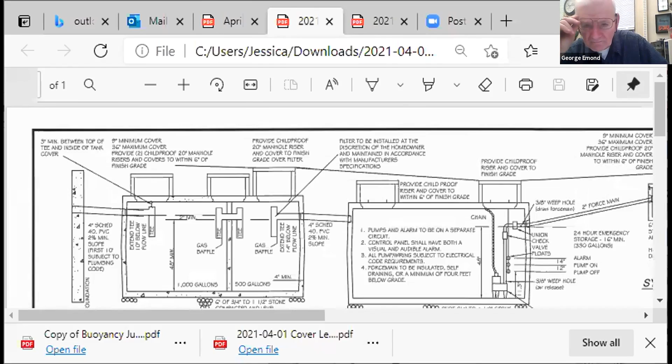Can you all see that? Yes. Perfect.

Thank you, Mr. Chair. For the record, Justin LeClair, McCarty Engineering. The letter you just read pretty much was my presentation for tonight. At this point, if you guys have any additional questions, I believe the letter is self-explanatory.

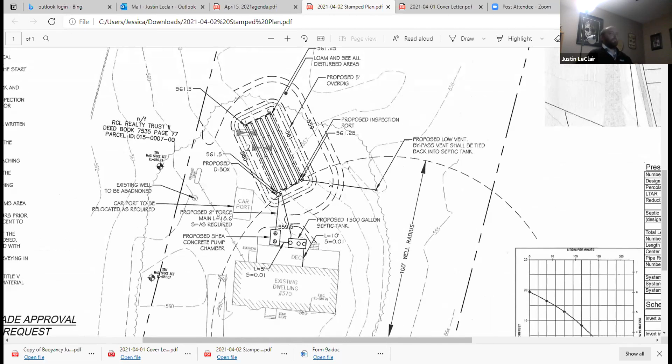As you can see on the plan, the house is here. This note, existing well to be abandoned, that's the existing shallow well located on site. The existing septic system is located in the front yard here. That will be abandoned and the tank will be crushed in accordance with Title V. With the proposed system in the back here: your proposed 1,500-gallon septic tank, your proposed 1,000-gallon pump chamber, and your proposed Presby field with the associated fill and off-grade needed to design it.

Justin, do you plan on pulling the tank out or just leaving it in place? I believe the plan is just to crush it in place. Okay, just a question.

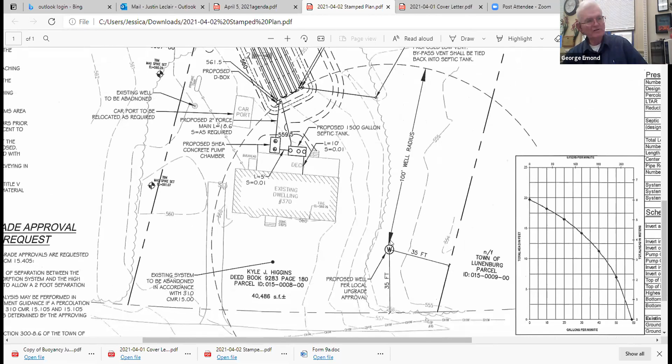Any other board member have any questions? I have one, Mr. Chairman. This is Perry Jewell, the vice chair. My question really just has to do with the well variances. In particular, you've moved them over to the other side of the house.

You have only 35 feet from the property line. And so that, in my mind, kind of raised the question of, are we going to be infringing on the rights of the neighbor to be able to do something in the future? I don't necessarily know the answer to that.

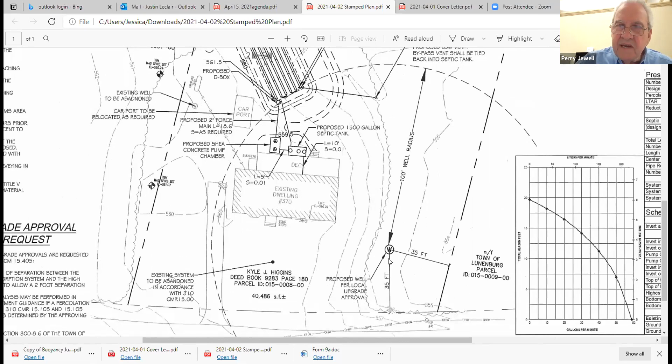I know in your plan you showed, I believe in the upper right-hand corner, and you might want to move it if you can, sort of a layout of the lots. Yeah, there you go. And I guess the concern is that the way you've shown this lot next door, it's a very small lot and very narrow.

I'm not really sure if it extends behind all three of these, but the way you've shown it is chopped off on the same line as the two adjacent lots. So my concern is, will the neighbor be able to do anything there, since we've kind of infringed on the distance he would need to put a well in or what have you.

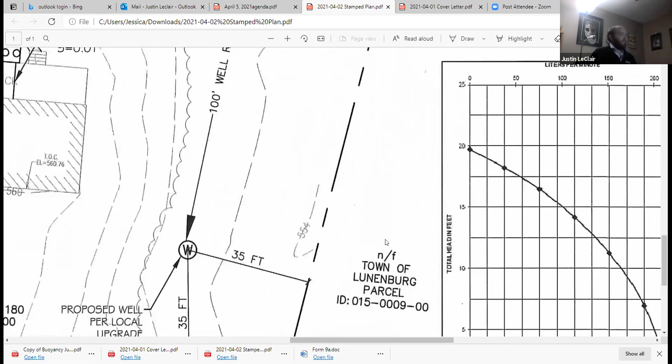What has the neighbor been advised, or have we talked with the neighbor? Is he aware of this, Justin? Mr. Chair, can I respond? Sure. So actually, the neighbor is the town of Lunenburg. I believe this parcel is a piece of conservation land, so it's undeveloped.

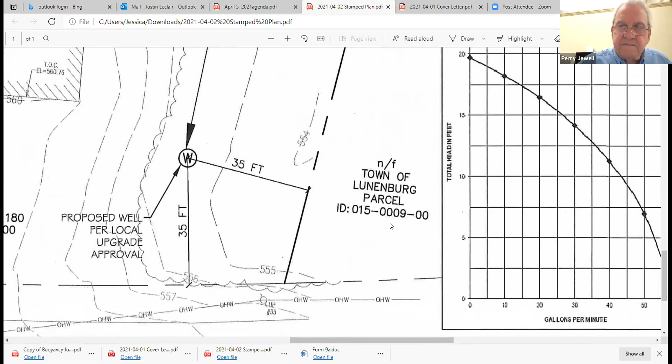We did look at that originally just to verify what that lot was. As far as we can tell, it's just an undeveloped piece of land that was given to the town. Because I think that number you show, the street number, up there in your site plan—if you look that up online, you do find a house. But that doesn't mean that what's online is correct at all. I trust what I see you have shown, that it's town property, and I would agree with you. It looks like it's narrow enough that nothing would be developed other than maybe access to the land behind it.

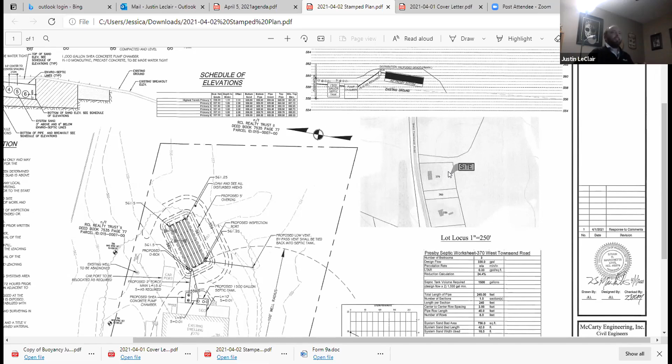Yes, and just so you know, this little locus I'm showing was pulled from MassGIS that we just used to give some reasonable reference to where we're working. And obviously with MassGIS, it's not always the most accurate representation. No, I understand, that's fine. Okay, that was really the only concern I had, Mr. Chairman.

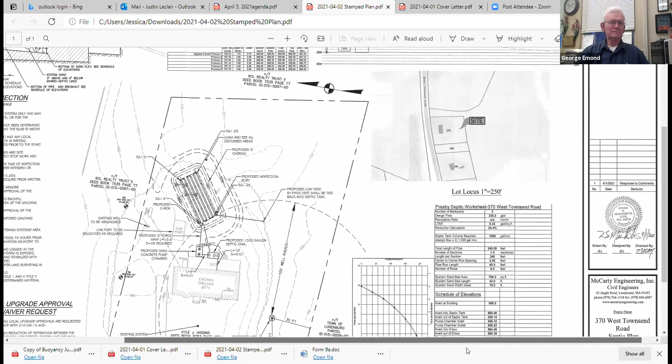Okay. Justin, do you work for Danny McCarty? Yeah, Mr. McCarty is now retired. I don't know if you've heard that—he retired a while ago. Okay, do you see him at all? Not since he went down to Florida, actually. Okay, all right. But tell him I said hello if you do see him. I know Danny quite well, I didn't realize he retired. And by the way, as an aside, I'd like to compliment you on your presentation—it was one of the best I've ever seen.

It's excellent, and I thank you very much for your effort and time. It makes it easier for us when we have all the information.

Thank you, Chairman. I would credit that to his son, Patrick McCarty, who took over the company. He's a licensed civil engineer as well, and his VP also. They took me in, and it's been about 5 years since I graduated from college with my engineering degree. They took me in and they've molded me, so I have to give my credit to them for this presentation.

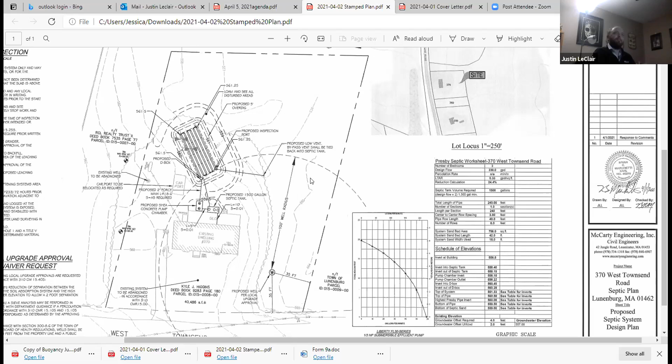Okay, Jim Garrett, sitting over there on the air, could you add any wisdom to this? You should take all the mystique about a Zoom meeting away, telling them where I am. Well, I don't know, you could be in Shirley.

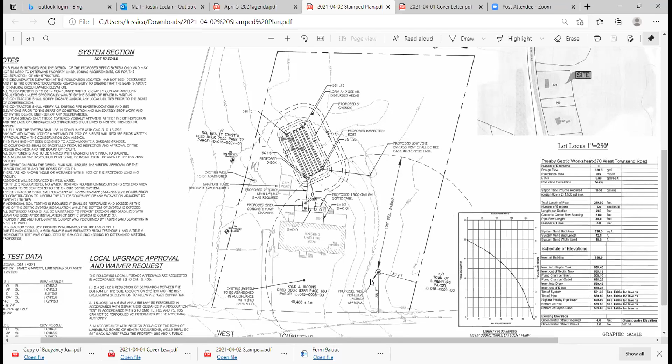So this is a tough little spot. You can see by the well arc on Justin's plan that if you move that well anywhere else on the site, we probably wouldn't have the proper offset from the proposed leaching area. It's hard because of the shape and dimensions of the lot to get 100 feet from both the well and the septic, but we were able to do it here by crowding in on the property lines. One good thing is the town land on the right-hand side and the street in front. When they put the new well in, it'll provide a much better water supply than the existing shallow well, so that's an improvement in itself.

I don't have any issues with the requested variances. It's a tough site with tough soils and a high water table, and they have a system that seems to fit in there pretty nicely. Okay, thank you, Jim.

Anyone else have anything to add? Would someone care to make a motion to grant or deny these requested variances?

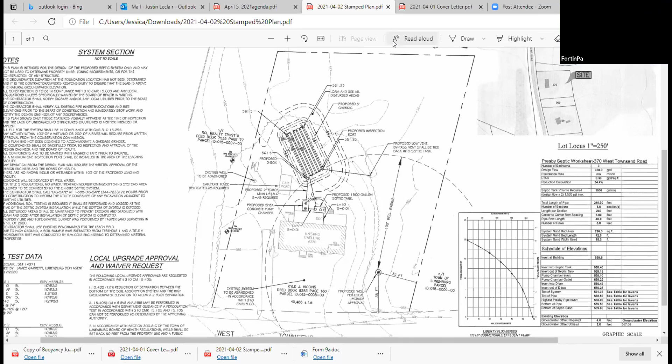I'll make a motion to accept the requested variances on the septic system and the well. That was Paul Fortin's motion. Mr. Chairman, this is Perry Jewell, I'll second the motion. We have a motion on the floor to grant the requested variances, and a second. I will now call a voice vote.

All in favor, say aye. George Emond, aye. Perry Jewell, aye. Paul Fortin, aye. Evan Waters, aye. The motion is made and it is approved.

You're all set, Justin. Thank you, nice job. Enjoy your evening.

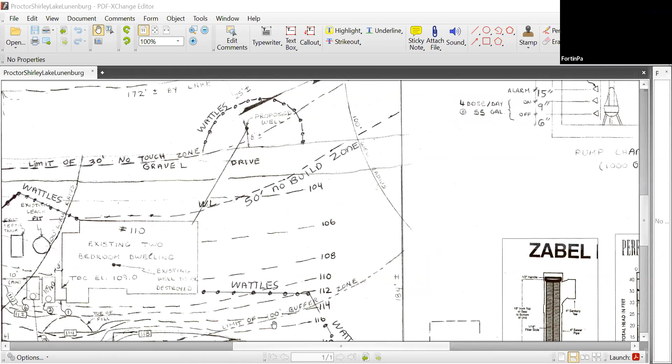Okay, the part I'm going to show here primarily, I guess, is—here's Lake Shirley. There are these wattles, which, as I understand it, are more for temporary purposes to limit any runoff into the lake. They're kind of like hay that's been bundled up into a temporary fence. So you see the proposed well there that Doug is showing being about 8 feet plus or minus from this gravel driveway.

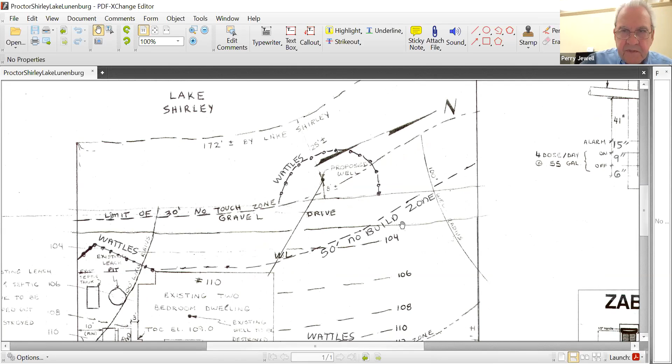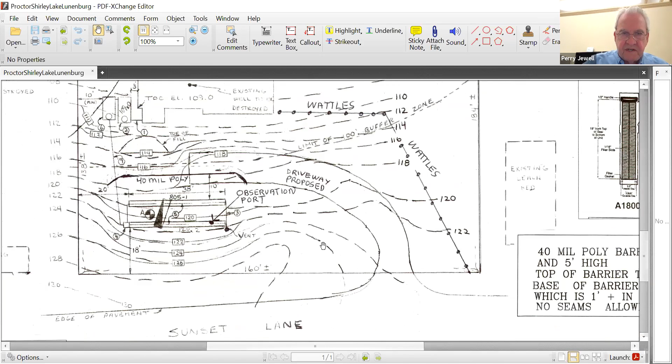Just being a little familiar with this area, this drive is a common driveway used by probably half a dozen homes on this side of Sunset Lane, the Lake Shirley side. It goes rapidly downhill from Sunset Lane, and I don't believe there would be many houses beyond.

This common driveway is really open only from the left end, and I don't believe there's more than one or two homes beyond. Doug, is there one or two? I think there may only be one. That's about right, it's practically at the end of that common driveway.

This driveway area in the very old days used to be referred to as Party Lane, for those familiar with Lunenburg. There's a number of houses in fairly close proximity here, probably half a dozen, and most of them, as this one is proposed, have some parking on the street side as well so they don't have to use that common driveway. So with regard to this common drive, it definitely is a drive.

I'm not sure legally whether it's just a right-of-way on everybody's property or exactly what the status of that is. Do you know, Doug? I'm not really sure. I know it starts off at house 150, and like you said, there's several homes, and once you get to this point, I think there's only one left. That would make sense.

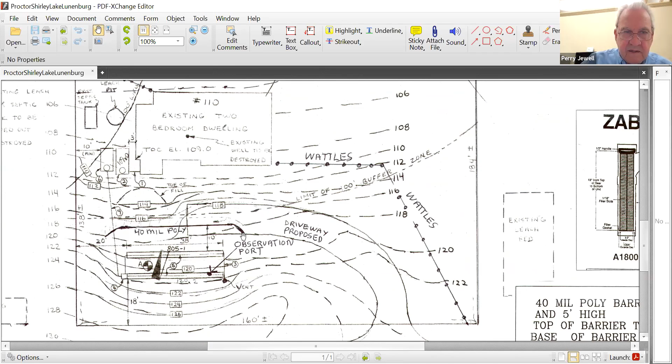And similarly, there's a big improvement here by moving the septic from this leach pit beside the home into the back and shielding it with a 40 mil poly.

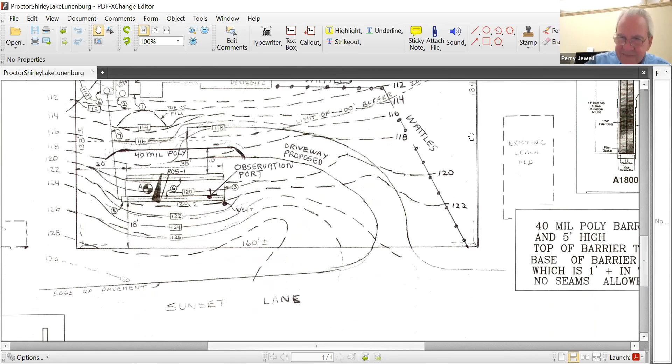This proposed driveway kind of doesn't exist today. As I recall, years ago work was started on that, and I don't know why it was held up. The rumor was that conservation had objected to this cut that was made in here from an environmental standpoint regarding the lake. But I don't really know whether that's been approved or not, and it's not in our purview, so it's not really an issue as far as I'm concerned at this point.

Ours is really limited to this septic and more particularly, I guess, to this well. I presume it's down there where it is, Doug, because this is going to be a drilled well, I presume, not a shallow dug well. Yes, and right now, currently, the well is in the basement of the house. I see, yeah. And that's why it's to be abandoned, to put the other one where it's shown to get that 100-foot setback to the proposed system, and have it out of the area.

Also, I would imagine it would be difficult, since this slope is fairly steep, to get the rig into any other part of the lot here. Yeah, it's so steep that would be probably impossible to move over this way. You're correct.

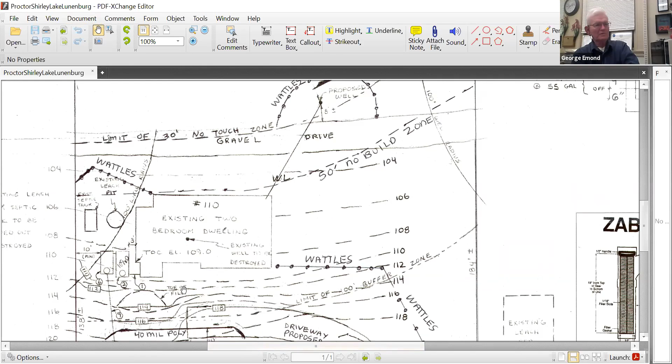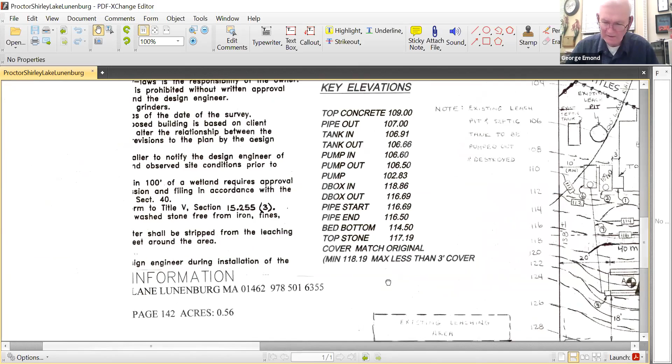I'll let others on the board ask you questions based on this, or I can move it around if you'd like. Thank you, Perry. Anyone else have comments or questions? Mr. Smith? I hear none.

Oh Jim, do you have any comments on this one? So the variance for the well, that 50-foot setback off roadways or common drives was typically meant to be protective against road runoff onto a potential well area. I've been down that gravel road before because the house just next door recently replaced their septic system. Not a whole lot of traffic down there.

The bigger concern we'll have, and we'll address it when they pull a well permit, is making sure when they drill that well, they seal the well casing to the bedrock to prevent any pond water from getting into the well water. That's usually more the issue with wells around ponds than runoff. A much better situation, as Doug and Perry pointed out, the well currently is in the basement of the house, which is way too close to the septic system. The new well will now be 100 feet from the proposed septic system, so all in all, a much better setup for the site.

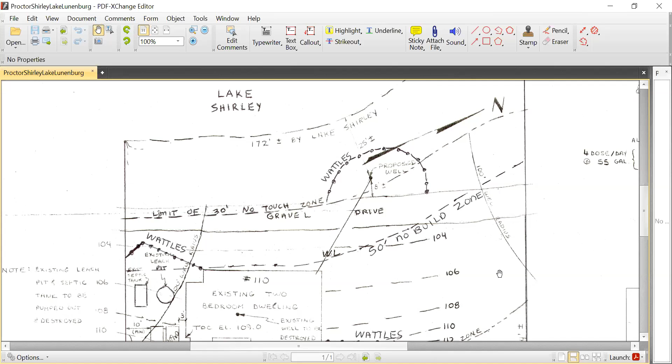Thanks, Jim. Okay, I didn't mean to ignore you, Jim. I had moved on to the next item on the agenda. I apologize. Oh, no problem. Okay.

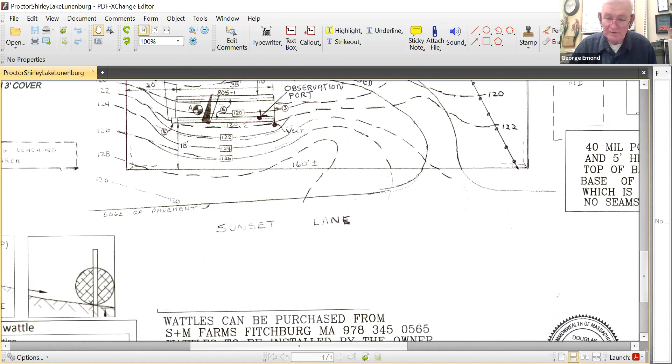Okay, I didn't hear any other comments or questions, so we can entertain a motion to grant the requested variances or not, as the case may be. Would someone make a motion? Mr. Chairman, this is Perry Jewell. I would be happy to move that we grant the requested variances consistent with this plan.

Thank you, Perry. We need a second. Someone would second this, please. This is Evan Waters. I would second that. We have a motion that has been made and seconded. We will now do a voice count to approve the motion. George Emond, aye. Perry Jewell, aye. Paul Fortin, aye. Evan Waters, aye. Aye. Thank you. The motion passes.

We're all done. Thank you very much. You're welcome, sir. Have a good night. You too. You too.

Yeah, let's see, what's the next one? Whoops, that's Sunset Lane.

I think, Mr. Chairman, the next one is the 60 Woodland on our agenda for 7:45, and that they will not be appearing tonight. Yes, and I'm looking - although, just for the record, this is the one that the board will recall we moved from a couple weeks ago. We approved it, but we wanted to ask if they wanted and had considered the public water. And Jim had made the point that the public water would be superior to the well.